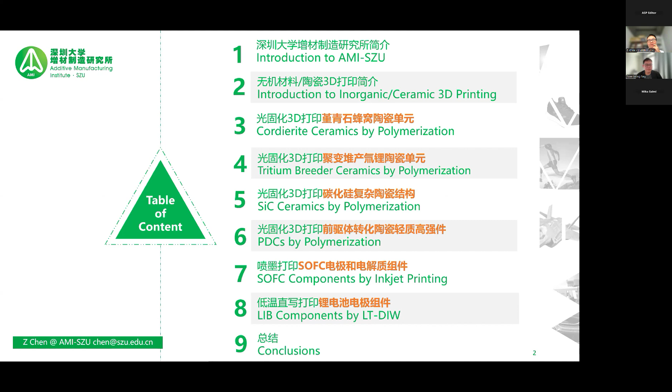A very brief introduction to the group: our institute has about 50 master students, including 7 PhD students, and 6 faculty members. In total, we have almost 70 people in the team for research, mainly focusing on 3D printing, including the material side, printing technologies, characterization of the printed parts, and the application side.

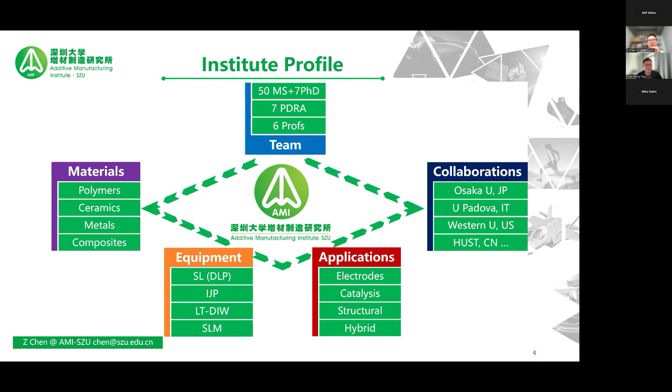These are the machines we have in our institute, for example the DLP 3D printing machines for ceramics and for resin, and also the DIW direct writing machine, SLM machine, and inkjet printing machine. If you are working on 3D printing of ceramics, you have to make your own slurry, paste, or suspensions, depending on the viscosity you need for the material. We prepare our suspensions or slurries using milling, control the particle size distribution, and sinter our final printed components using furnaces.

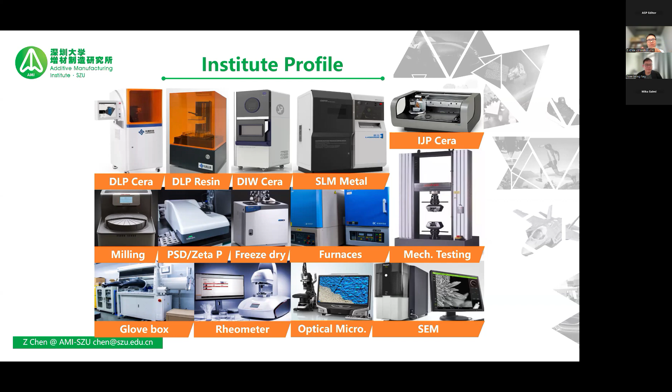And we also got some other characterization facilities, for example, the microscope and mechanical testing machine. So basically, for over like 80% of the work we can do in our institute.

An introduction to the 3D printing of inorganic material, basically for the ceramic part, as the forecast predicts that in 4 years time, we have like 7 times the increase regarding the high-end hardware, and also the technical parts, material side as well. So the ceramic or inorganic material additive manufacturing market is still expanding.

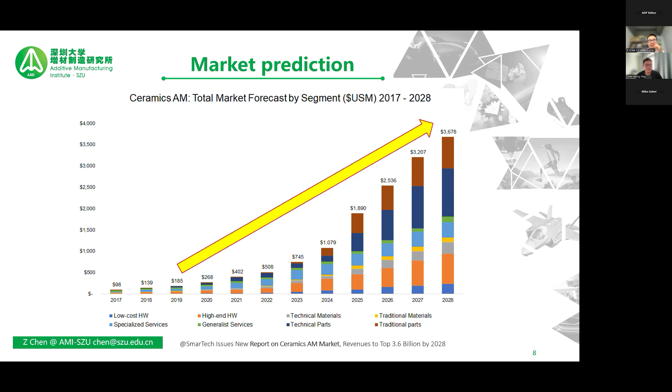For ceramic 3D printing or inorganic material 3D printing, it's not like resin or metallic components, because if you try with resin or polymer, metallic 3D printing is mostly like one step, although there are some heat treatment or other types of post-processing steps involved.

They are straightforward. So for inorganic or ceramic additive manufacturing, you have to prepare your own slurry, which contains lots of polymer content. We have to remove them afterwards, after the printing process. So the shaping is basically directly relevant to the 3D printing process. Then there's heating. If the material is aqueous based, then we have drying as well. So heating and drying are some sort of basic post-processing steps for 3D printing of ceramic or inorganic material.

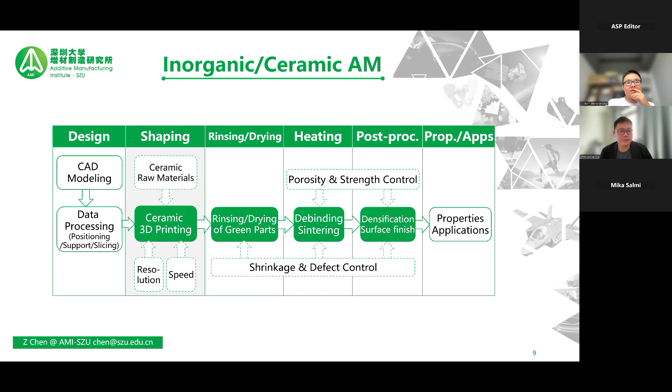So we were honored to have this publication in 2019, titled 3D Printing of Ceramics, a review, and it got nearly 2,000 citations till now.

We classified over 10 types of 3D printing technologies that can be used for printing ceramic, inorganic components. So basically, you can see from this table, in terms of popularity, stereolithography or DLP, digital light processing - these two processes are considered the most commonly used 3D printing process, or we say today, VAT photopolymerization (VPP). There's also binder jetting and selective laser sintering, which are of course very useful for 3D printing of ceramics, inorganic material. And the very low cost one is direct ink writing, because it's just like squeezing material from the nozzle, extrusion based principle.

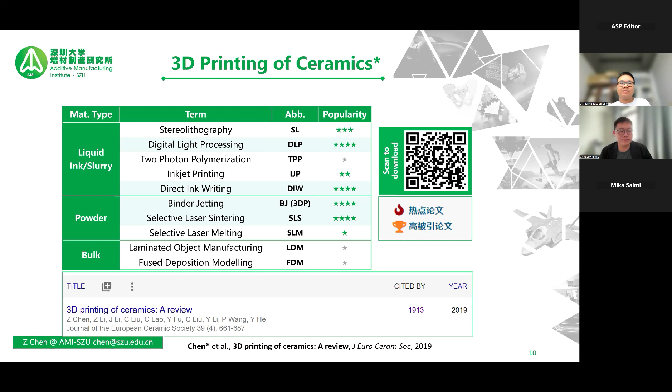And these are some of the examples which are quite popular in the industrial or academic field for research purposes. And some of the results I'm showing here are the 3D printed ceramic components. I was holding all these pieces of materials, components, because I want to show that these components are very delicate and also have fine features with high precision.

So these samples as well, the outer circles are mostly oxide materials, and the inner circles are some sort of polymer ceramics or inorganic material, which are more, in terms of functionality and structural durability, much higher quality. So they have different colors, which are very different from the oxide materials.

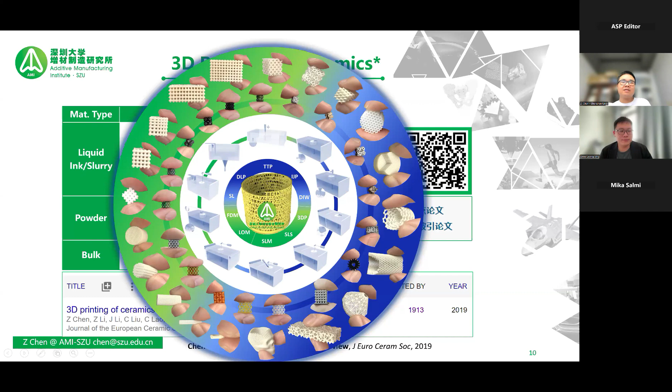And from now on, I'm going to show you some of the examples our group prepared for inorganic material 3D printing. So the first one is cordierite ceramics by photopolymerization 3D printing, and the basic background is the purification of air for vehicles, because nowadays in China you can see that we have lots of electric vehicles, but previously, like dated back to 5 years ago, the majority of cars were using gasoline. So in terms of pollution, in terms of purification, there's large demand.

So at that time, we started using cordierite ceramics for 3D printing, but people tried with different kinds of 3D printing technology. For example, SLS, DIW, they have low resolution. So at the time, we proposed using photopolymerization based 3D printing method for preparation of this kind of honeycomb structure for purification purposes.

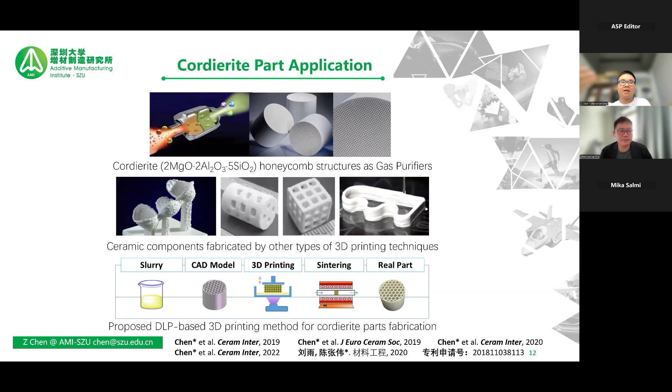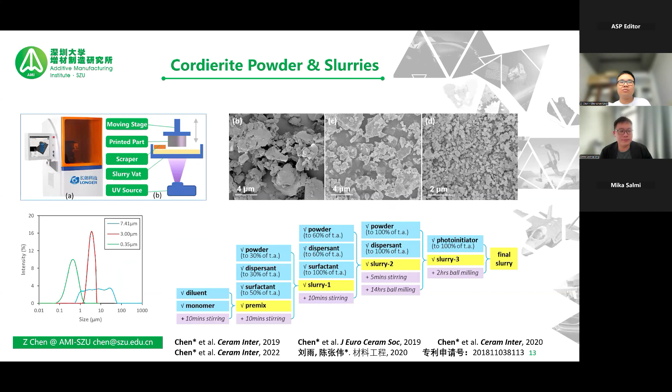And we started preparing our own slurry. The slurry is based on commercially available powder, different particle size powder, and then we tried adding lots of additives, organic additives, for example surfactants and dispersants. These kinds of additives can help improve the rheological properties of the slurries we use. And after preparing the slurries, we test the sedimentation ratio as well as the viscosity, because these two factors are very important for maintaining a stable slurry.

If the slurry is not stable, for example, if you print during the printing process, like 2 or 3 hours or even 10 hours pass, then the slurry sediments. So that can become a problem, because if they are not stable... So we tried different kinds of recipes and see which one is the most stable one.

And afterwards, we try with the most stable one, and see how we can print well with this kind of stable slurry. So we try with different units, for example, the holes, the single lines, the single layers, and lots of things we can do, and test the curing thickness as well as penetration depths and the critical exposure energy and so on.

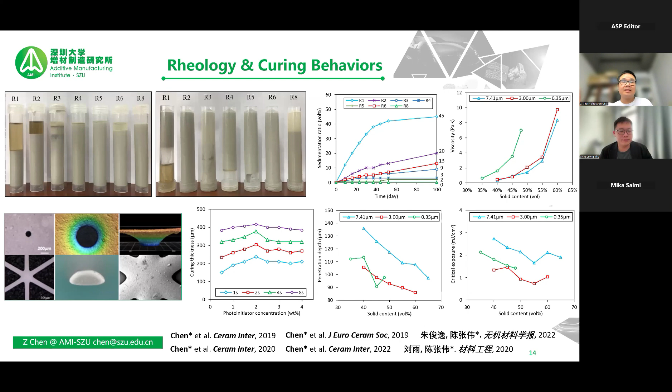There are lots of things we can do for characterizing printability. This is a special term in the 3D printing domain. Printability is a vital factor that controls the printing of the final 3D parts. Based on the design and topological improvement or optimization, we have been able to design different kinds of structures which are very different from conventional parts.

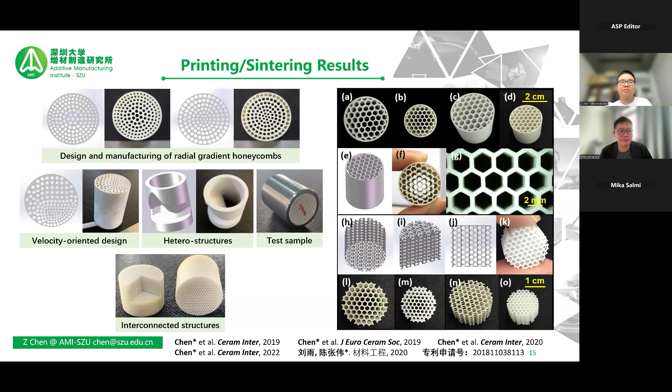Then after printing, we do the test. Some of the research is still ongoing. We are able to print many sorts of inhomogeneous structures which are not possible with conventional technology.

The second one is lithium orthosilicate, which is very interesting using 3D printing, vat photopolymerization 3D printing. The basic background is, nowadays we have many nuclear plants. Nuclear plants are based on fission, but there are some pollution issues, some leaking problems like in Japan. So fusion is another alternative method, nuclear fusion, which is the ultimate energy resource for humankind. It is regarded as a man-made sun.

In the sun, there is fusion. So nuclear fusion is happening, and currently it's still ongoing because it is not yet commercialized. What's happening inside? Currently fusion is made using the isotopes of hydrogen, tritium and deuterium. Deuterium is abundant in nature, like in sea water, but tritium does not exist in nature.

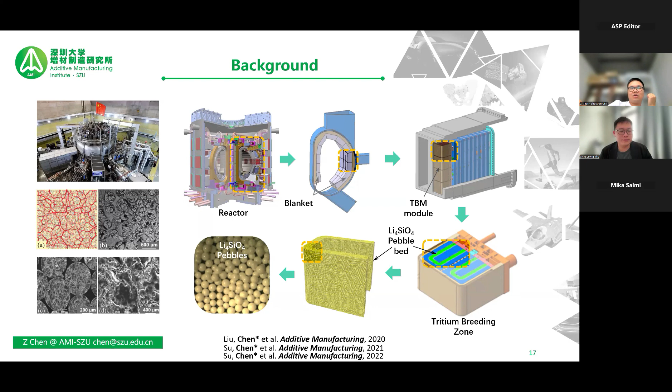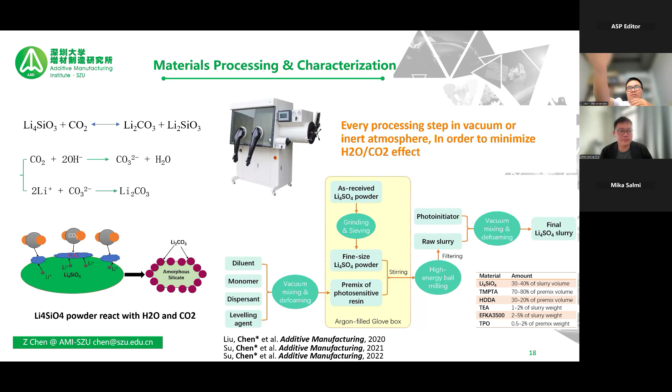We started preparing our own slurries for the first time, because lithium orthosilicate is a very reactive material. It can react with CO2 and H2O in air. So we had to put all these material processing procedures inside an inert atmosphere, like a glove box, and then we produce our own slurries, similar to the previous case.

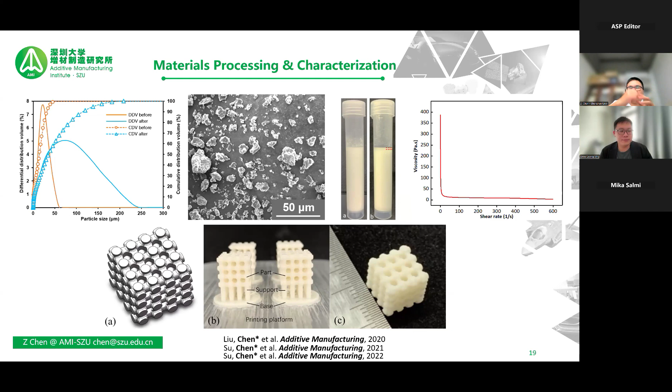Then we use photopolymerization 3D printing to print this kind of configuration, structures which are no longer the pebble bed structure. Instead we have a lattice structure here, and we tested the results, and they are much better than conventional pebble bed structures.

Second, we propose a generative shaping and material forming strategy, in Chinese 成形成性. This is because lithium orthosilicate itself is very expensive. We can say it's not commercially available, because we have to get this material, the powder, from our collaborator—there's no existence in the commercial market. So first it's expensive, and second, it's sensitive to air. These two issues are not easy to tackle.

So we tried a combination of A plus B, meaning two inorganic materials—this one and silicon dioxide. These two materials are no longer expensive; they are cost effective and low cost economically, and secondly, they are no longer sensitive to air. Because they are cheap and not sensitive to air, we can mix them together into a mixed slurry and then do the 3D printing.

So the 3D printing in this process is making the shape—there's a generation of the shape. Secondly, at high temperature, these two materials react together, like reaction sintering, generating the new target material, lithium orthosilicate. So: low cost, abundant resources, simple processing. This overcomes the two issues I previously reported.

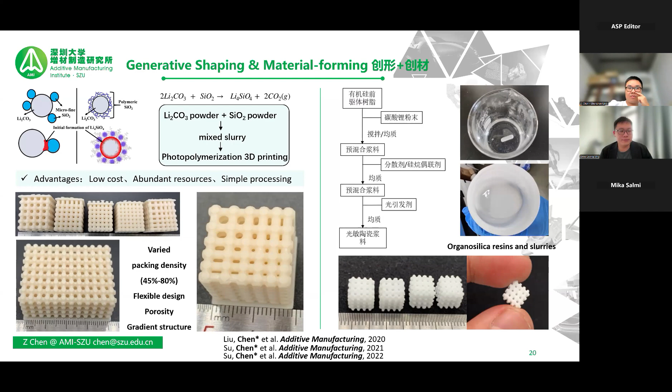And also during the whole process, you can see that we have some sort of improvement, because you know that 3D printing can generate a staircase effect. There's no way that we can eliminate it without some chemistry principle behind it. If you only try minimizing the layer thickness, the staircase effect always exists. But using this strategy, we can reduce the staircase effect, enhancing the surface quality.

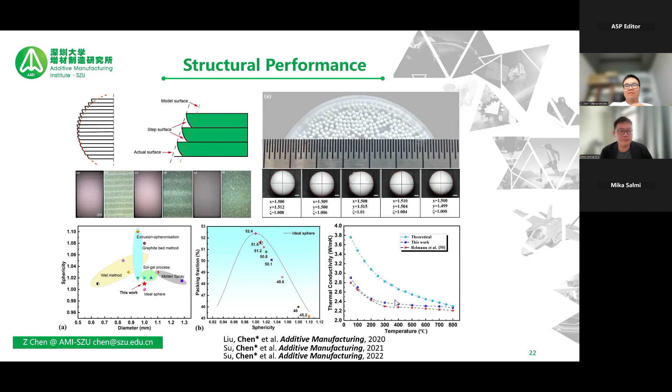For example, the staircase effect can be largely reduced, and surface roughness reduced by over 70% compared with the conventional method or previously reported 3D printing methods. And we are currently working on the reaction principle and seeing how it changes the surface roughness. Of course, there are some basic evident principles, like liquid phase coverage during the high temperature sintering. We are still working on that and seeing how it can improve the final results.

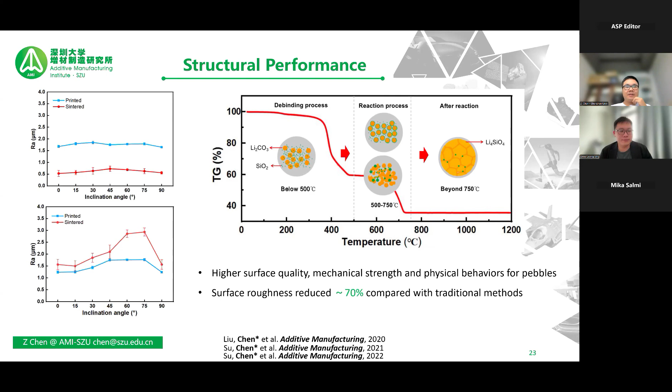And of course, we try with dual phase components like lithium orthosilicate as well as lithium titanate, these two components, and see what can happen, 1+1 is larger than 2 because of the multi-material. Then we can reach higher relative density as well as smaller grain size and better crush load. The crush load is very useful for the tritium breeding application. And this is the whole process.

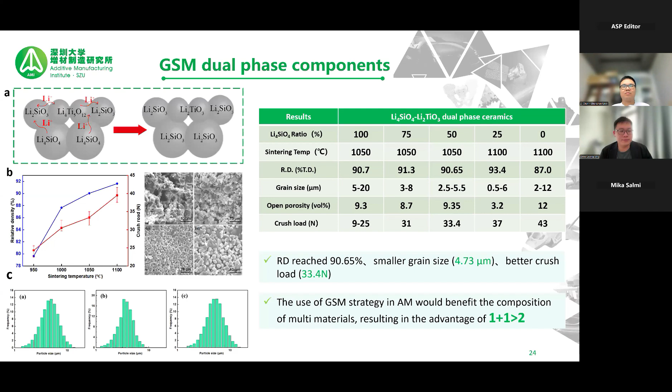And our student also drew this very nice picture showing that compared to conventional arbitrary bulk porous structures, the pebble bed may have some improved performance. If we try 3D printing for the lattice structure, the performance can be even better. And if we try the GSM, generative shaping and material forming strategy, the final result is much better. So we tried this material, and we are going to expand the applicability of this strategy and see how it can work for other combinations of materials rather than lithium-based materials.

Okay, so afterwards we had some international media coverage reporting this outcome, including English media as well. And the next one is silicon carbide ceramics by photopolymerization.

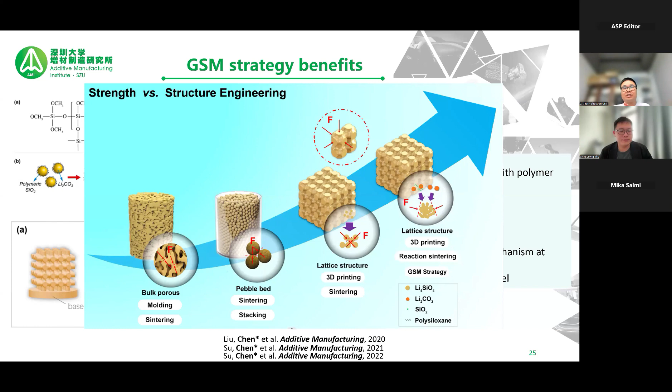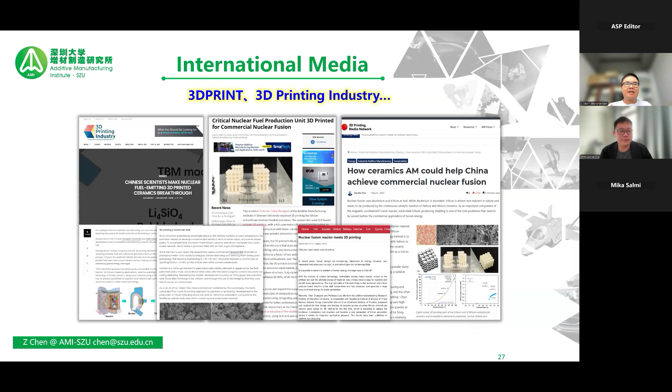For silicon carbide, if you want to use photopolymerization, it is much more difficult than oxide materials, because silicon carbide has a large light absorption coefficient compared to alumina and zirconia, like 10 times higher. So it's hard for it to be photopolymerizable. And what we propose is a kind of pre-oxidation. It means heating in air or even in an oxygen atmosphere, forming very tiny thin layers of silicon dioxide coating. So these shell coating structures can improve the printability.

You can see from the left hand side the single layer thickness can be improved like 3 times. So it's now like 107 micron, and the original one is 40 micron, so it's 3 times. And now we have like 120.

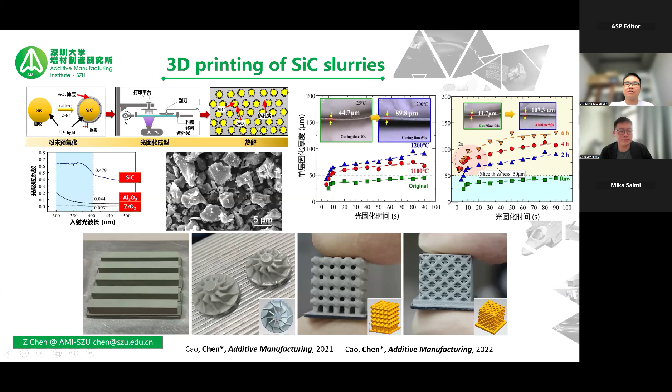So afterwards, based on this strategy, we can successfully produce 3D printed silicon carbide with highly complex structures. And you can see that we can apply the whole strategy very smoothly to different kinds of structures. After printing and sintering, we obtain very delicate, refined structures.

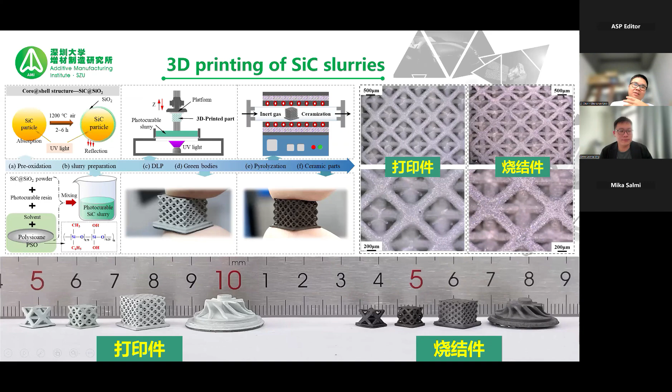It means that there's no slurries, no sedimentation, no viscosity issues; lots of things can be avoided. So using ordinary printers, like very cheap printers, you can just print the PDC, and there's no scraper needed for leveling the high-viscosity slurries like previously reported for all sorts of powder-based slurry. And

the resin, of course, is cheap, and one more thing is we can have a very fine control over the molecular level. Then we can dope lots of things like titanium, zirconium, ferrite. So all sorts of materials we can dump inside at this molecular level. The doping or the controllable recipe can be very advantageous, because of enhanced performance like mechanical properties, and also the electromagnetic performance can be enhanced by this kind of strategy.

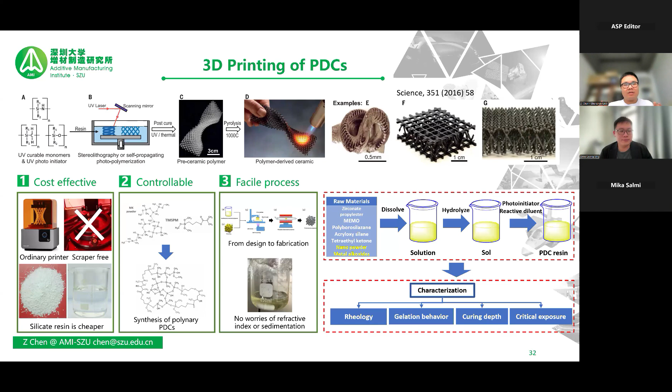And of course, resin. Okay, so the only additional step is using the high temperature pyrolysis. Well, it's the same as sintering, but the temperature is slightly lower. We call it pyrolysis because the whole process is more like a chemical reaction compared to the normal sintering stage. And we produce our own recipes. This is more chemistry, and we try to see the viscosity, the depth of penetration, and also curing behaviors, all sorts of things. And then we measure the sintering or the pyrolysis performance as well.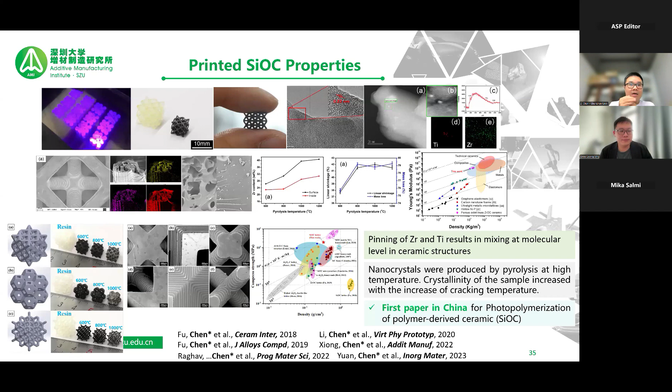Of course, using this method to produce 3D printed PDC is very, very difficult sometimes for larger size samples. So we investigated how we can improve the thickness and how we can reduce the cracking happening inside these structures. Because for this material, there's no powder involved, the weight loss is very, very high compared to the powder-based slurry, and almost 80% of the weight can be removed from the structure. So there's a large shrinkage, as well as resulting cracking and deformation.

And we try with lower melting temperature polymers, which can be used inside this material to create microchannels, which facilitate the removal of the high melting temperature polymers or organic additives, and this makes the channel smooth for the removal. And as a result, the cracking can be eliminated. Then we try different thicknesses for the monolithic material as well, and these have a larger size as well as good mechanical properties.

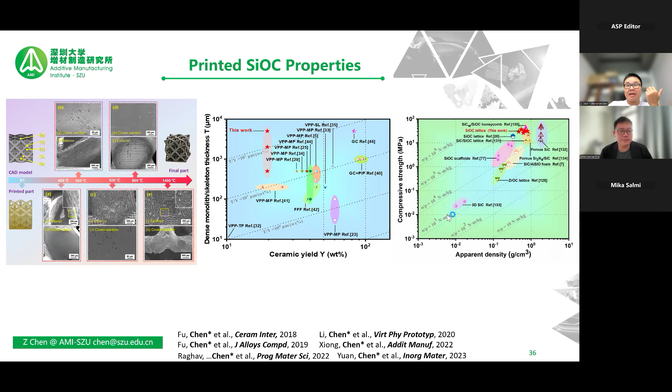And a very minor summary of what I have been talking about previously. Starting from the inorganic material like ceramic powder, which is the target powder from the beginning to the end, it's just generative shaping by 3D printing. It means that the 3D printing is only to create a shape. There's no possibility of generating new material. At least the majority of material stays the same.

Then we propose using A plus B methods, or the generative shaping and material forming method, like a combination of inorganic material with inorganic material, and inorganic material with organic material. And finally, the precursor method using PDC. It's all organic material. So this is the generative shaping and material forming.

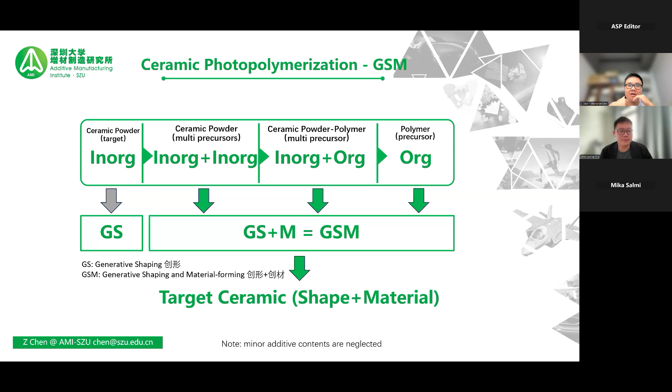And we also produce our high-speed VPP 3D printing. You can see that it's like a CLIP, with the underlying mechanism being the photoinhibition strategy. We want to use this method to produce, firstly, the commercially available resin, and secondly, the PDC precursors. And then we try with the slurries, because the slurry is very difficult with high viscosity, and the viscosity increases from the resin to PDC precursors and then the slurry. So with the increase of viscosity, the difficulty is also augmented for this kind of technology. Well, there are some benefits, of course.

First one is the elimination of staircase effect using this strategy, and secondly, of course, the improvement of isotropic behavior, which is very useful nowadays. For 3D printing, the XY direction is different from the Z direction if we try to do the mechanical testing.

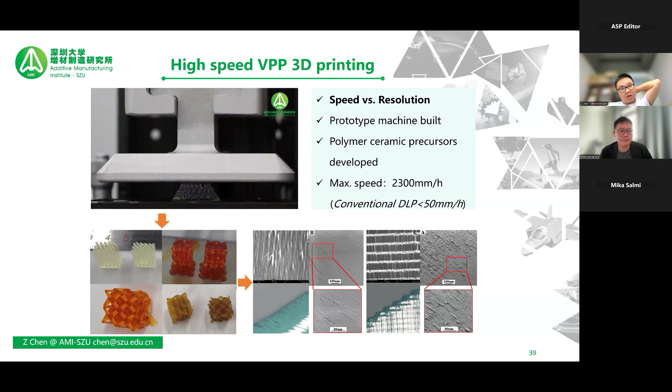Then, apart from VPP photopolymerization, we also work on the solid oxide fuel cell using inkjet printing. Because time is limited, I only briefly introduce that 3D printing can produce inorganic materials within the SOFC components, like electrode and electrolyte, because some of them are dense and some of them are porous. We prepare our own inks with low viscosity and high solid content, and we were able to produce the porous structure and a very thin electrolyte structure as well, only 4 micron with 20 passes, 20 layers, and then we try

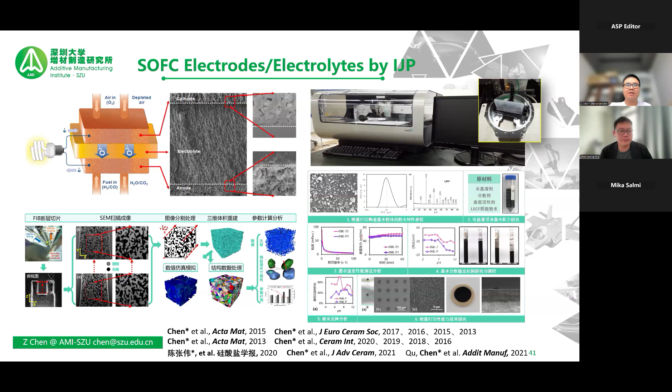a full battery as well to see how it can improve the electrochemistry behavior. Okay, so I'm not going too much on these conclusions.

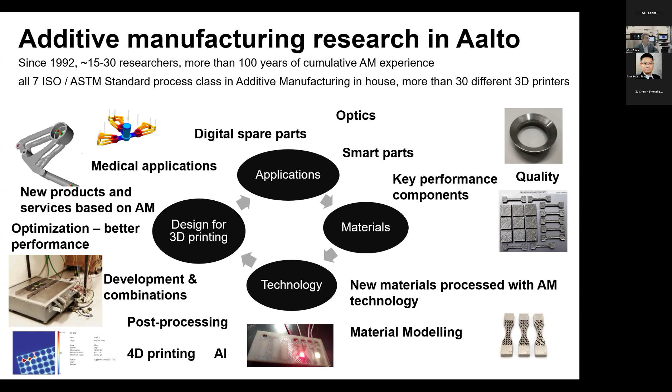Material modeling, especially for metals, is also in our interest. And for the AM technology itself, we develop our own technology and combine it—4D printing and AI, especially process monitoring related things, are very important. For printing, you always need 3D models, and this is where you can optimize the design for better performance. So this is what we do at Aalto.

Now to 4D printing. Basically, what 4D printing is: you 3D print the object, then expose it to a stimulus, which can be temperature, light, or something else, and then over some time it will change its form. That is how it's defined, and the fourth dimension here is time.

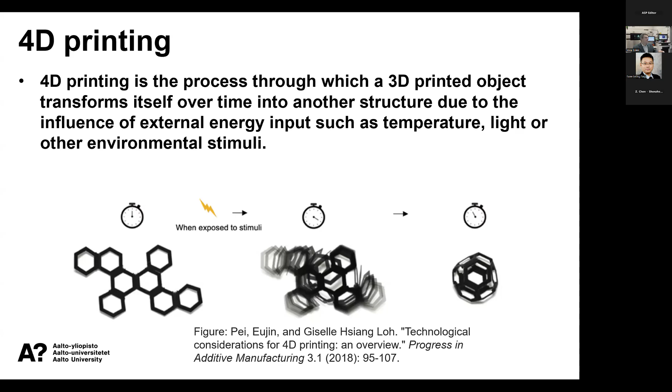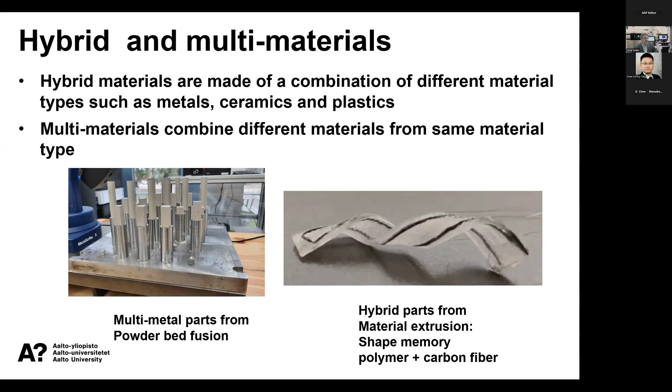If you try to define what a hybrid material is, in this presentation I will use it to mean when we are combining different material types. So we have metals that we combine, for example, with plastics, or metals combined with ceramics, and so on. That is a hybrid material—not combining two different steels together. There's also multi-material with powder bed fusion, or hybrid material parts where there's a shape memory polymer with carbon fiber inside.

Now, more to the research we have done. The first one is self-sensing hybrid parts.

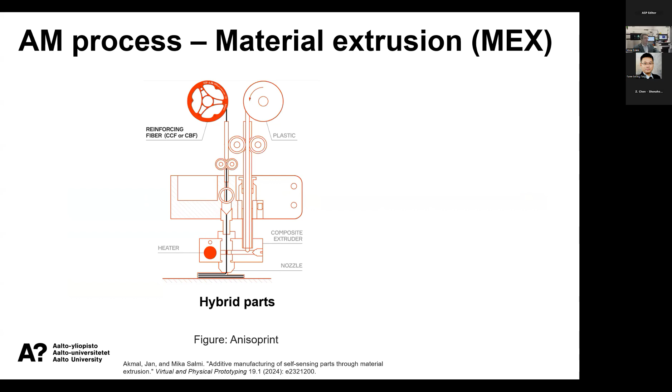So we are using an Anisoprint. This is a material extrusion type of printer, but what's unique here is that it can feed fibers through the nozzle, and we can position fibers inside of the prints. And of course, we have tuned the device so we can also put metal wires inside of a plastic part.

So what was the first thing we tried with this? Trying to make this kind of self-sensing part. Basically, if you know how a strain gauge works, you have a strain, and then you have this kind of gauge, and you're measuring the resistance. If you are bending, pulling or even pushing it, you should have a different resistance because the material or the diameter of the wires will slightly change.

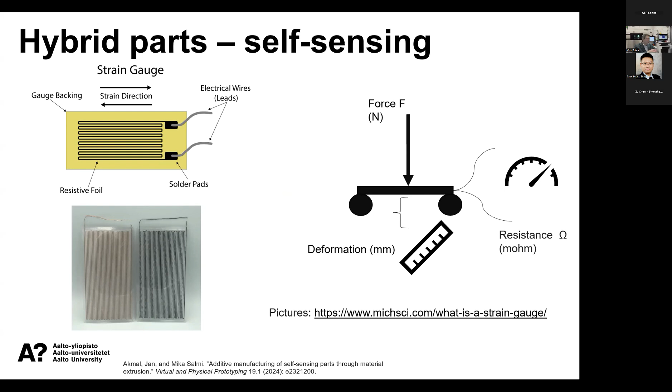So what we did was make two different kinds of test plates from different materials, and then we tried to bend them and see how the resistance would change. Different kinds of specimens. Specimen A has only one wire. We have a flat plate with a width of 35 and a length of 70 millimeters, and only one carbon fiber or one copper wire there.

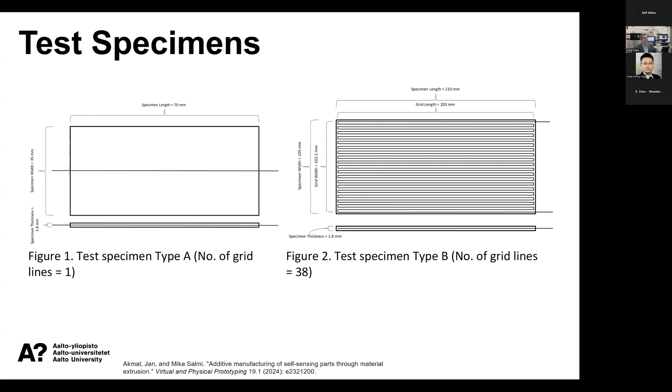And then we try to use the whole width of the specimen, going back and forth, basically one wire going back and forth as much as possible, so 38 times going back and forth, to make the phenomenon bigger, so the resistance change would be bigger because there are more lines there. So this is how we test it.

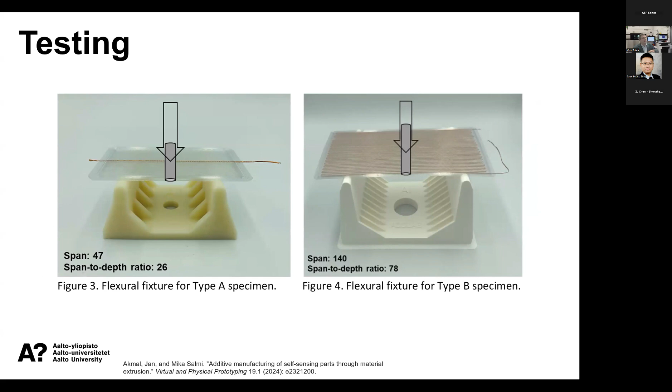We make a jig where we push it, and we measure how much we are pushing, and we measure the resistance change, and this is the results. Actually, you can quite well predict how much it's been bent if you have enough fibers there. So if we first look at this picture from the bottom left.

This is specimen A with the carbon fiber, only one wire of carbon fiber, and here you can actually see that it's hard to say anything because there is so much noise. So with only one wire, you cannot predict too much. But then if you have only one copper wire, this follows quite nicely how much you have deflected and what the resistance change is there.

And then of course, if you want it better, adding more actually doesn't help, because there are these corners, and you don't even get too much better values, slightly better, but not too much. And then with the carbon fiber, where you add the carbon fibers, you can get it better because this noise will get lower.

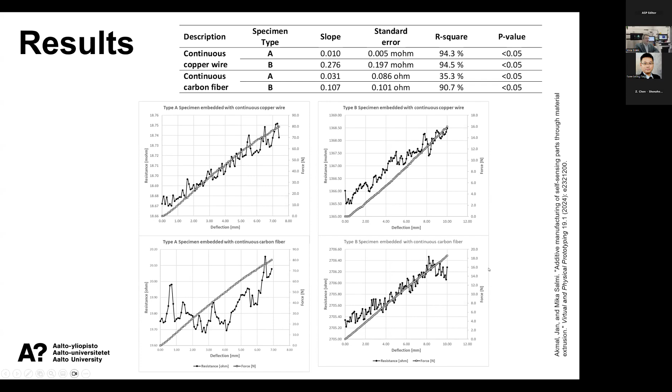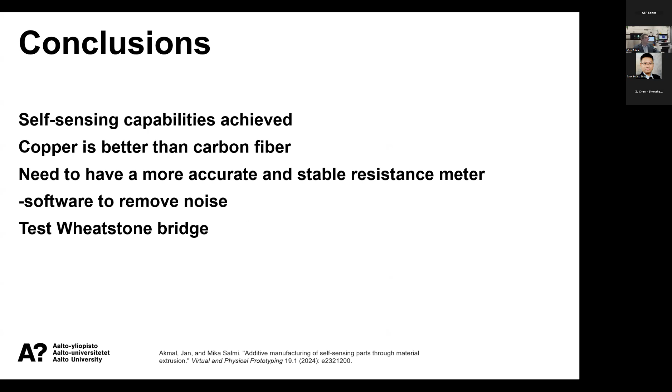So basically about this, this copper is better than carbon fiber, and what would maybe be the next steps would be to have a more accurate and stable resistance meter, or maybe some software to remove the noise, and maybe building a Wheatstone bridge so that could turn this resistance to voltage and have better accuracy for the measurements. But the basic concept works.

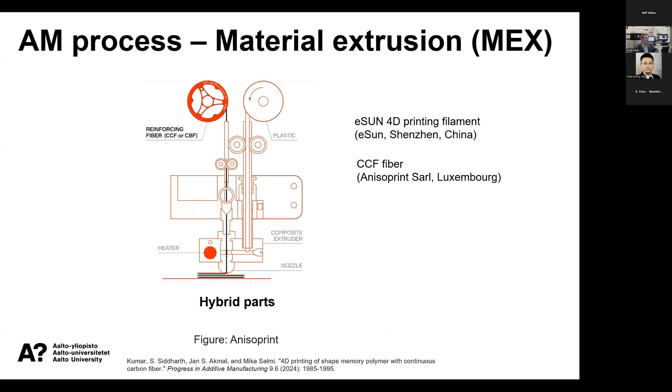Okay, the next one, this is hybrid parts with shape memory polymer and carbon fiber. So again, the same printer, but now we have a 4D printing filament there, actually from Shenzhen, China, and then we have a carbon fiber from the Anisoprint.

And what we are looking at here, we are trying to see if the outer geometry of the specimens would be the same, but how the different kinds of layouts for the carbon fibers would work. So we have a horizontal layout, we have a vertical layout, and then we have a cross layout.

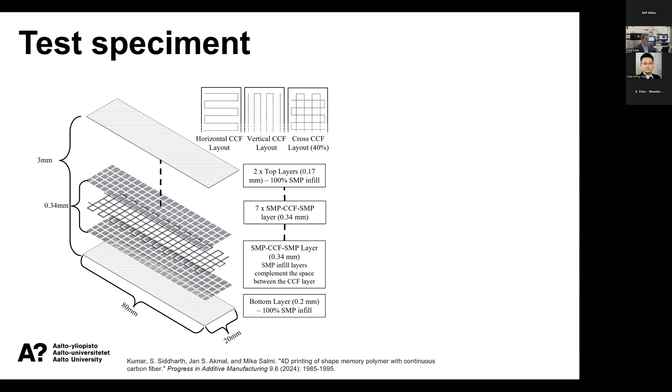And how the samples are made: first we make a bottom layer, which is pure shape memory polymer. Then we have layers with carbon fibers and shape memory polymer, and then we have the top layers which are again pure shape memory polymer, and between the fiber layers there is also shape memory polymer. So then we can get the nice matrix parts.

So the process: we test the specimens, then we are heating them up at 80 degrees Celsius for 10 seconds, and then we are doing this kind of mechanical deforming, because we want to change the shape.

So when it's in the soft state at 80 degrees, we will change the shape and let it then cool down. So then it will have that shape, but we bend it slightly, not too much so that something will really start breaking there, because then we don't know actually what we are measuring.

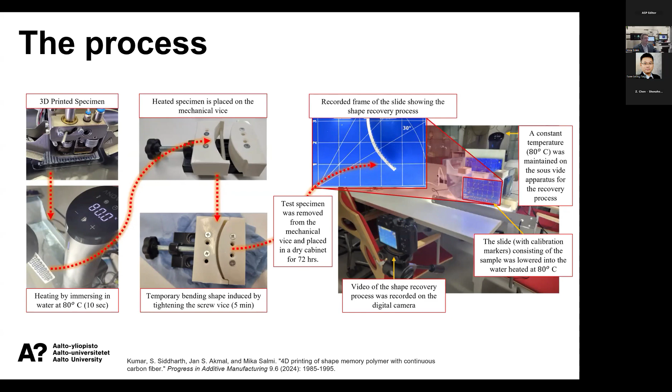And then we dried those samples, and then we put those in hot water and recorded the shape recovery process, using a digital camera and camera monitoring with some software to really get detailed answers on how these different fibers would influence it.

So here are the specimens. We have a control specimen with no carbon fiber, vertical carbon fiber specimens, horizontal, cross with layout 40, cross with layout 50, and cross with layout 30. So different kinds of infills, and of course we could use other kinds of fill patterns too, but this was the first try to see.

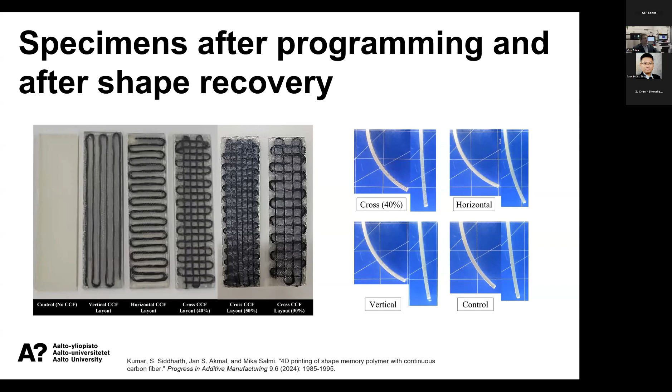And actually there is quite a big difference between these. So actually those fibers will work like a spring. You can have a better recovery rate with this, and you can have a better fixity with this. And here are some results.

So if you look here, the yellow line is the control. Actually, we can influence how fast and how much it will recover.

So for example, shape recovery with that geometry is about 80% with the control. And if you put the vertical, or have the cross, we can get somewhere in the 90%, which is much better. But of course, if you want it worse, we can put the horizontal.

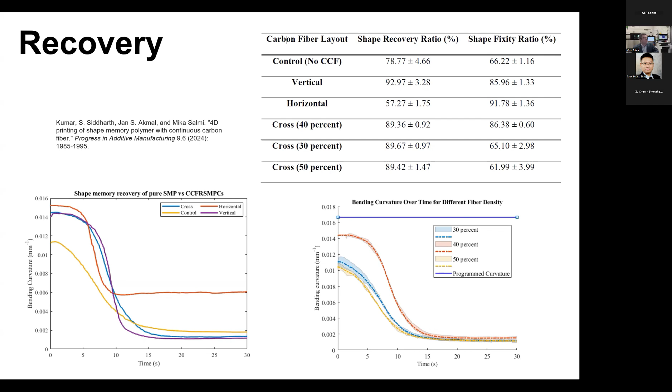So with the fibers, here's an example. We have horizontal versus vertical. The horizontal is faster, but the recovery rate is not so good.

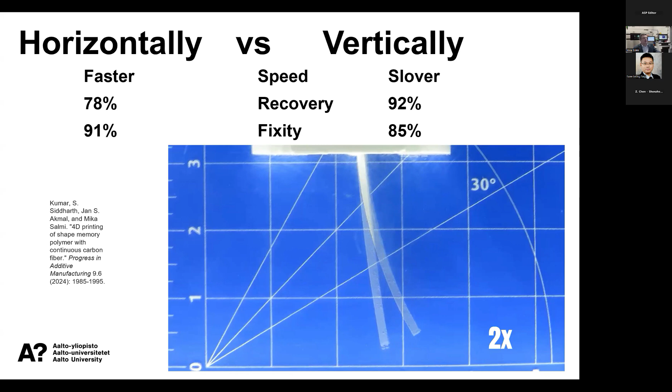So actually influencing the properties, what makes this interesting is that we can put different layouts in different places. So we can really try to tune the material for how it behaves. Some conclusions: to improve the shape memory capability and have a higher shape recovery ratio or higher shape fixity ratio, this fiber layout and density has a big influence.

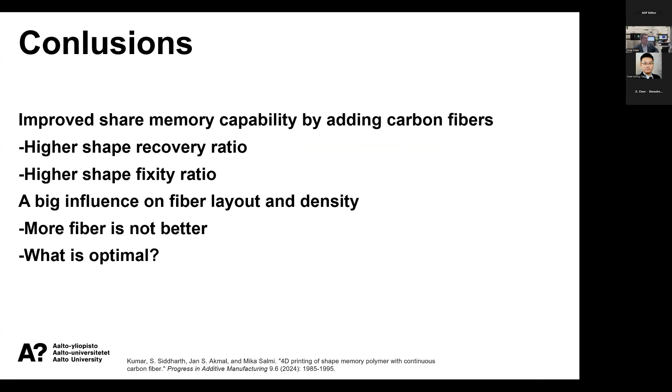And to be honest, more fiber is not actually better. So what is optimal is still under work and to find out. Okay, then we could go to the next one.

So this is again a desktop printing setup. We have material extrusion, but now we take another process after it. So we are using atomic layer deposition to have some kind of electrical conductivity. What we are aiming for here is making an electric circuit for an ultraviolet light sensor. This is a space application related thing.

And we have a standard Ultimaker S5 Pro printer, and we are combining ABS and polypropylene. So actually the first thing here was to find suitable materials that we can join together, not necessarily having huge mechanical properties, but having the ability that we can print them together.

And the other one should be where this ALD process sticks very well, and the other one where the ALD process doesn't stick at all. So we tested plenty of different materials to try to see which could work in this ALD process, and then we figured out that ABS works very well in the ALD process, and coatings don't attach there. So it's a very good material pair for this kind of selective coating.

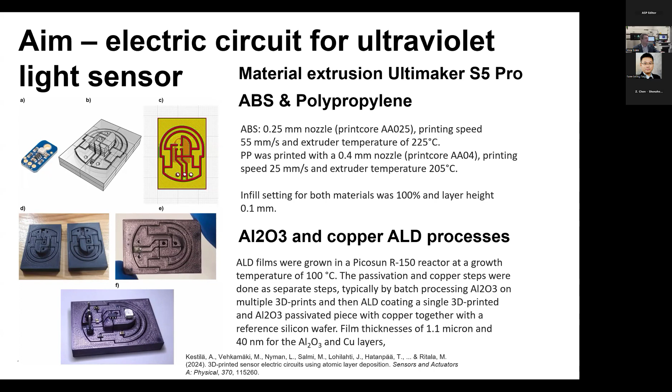And then we actually tested this. So we had the normal one. We joined the components in the circuit, and then we put it to the test.

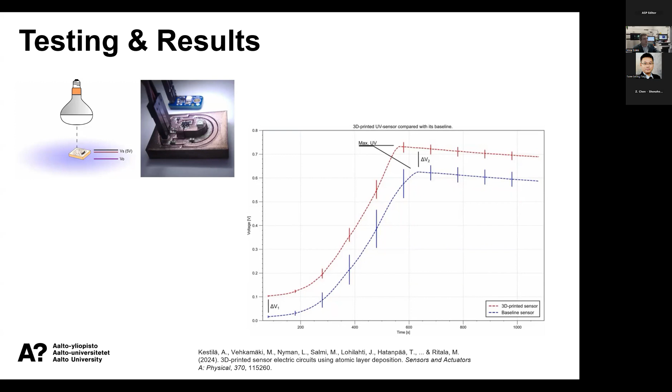And actually, if you look at the baseline sensor and then this 3D printed sensor, it actually quite nicely follows the curve. Of course, there is some voltage difference, but it seems quite constant here - there is no huge difference there. So that's actually quite good.

So we were able to 3D print this sensor board for this ultraviolet light sensor, and then this was selectively conducted. So we were able to do it, meaning a much more automatic process. If we could print the parts and then put them in the ALD reactor, we can get the circuits ready. There was some additional resistance in the 3D printed sensor, but that wasn't very significant.

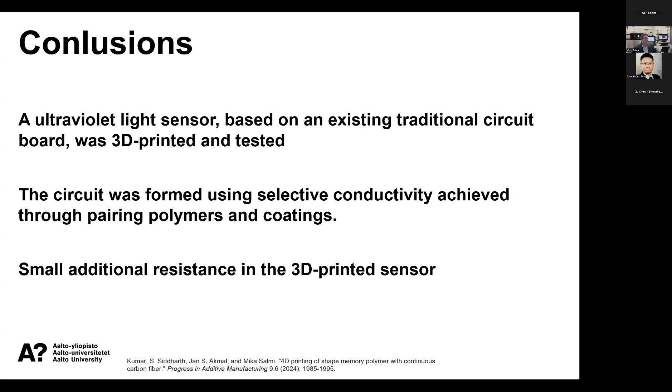Then we could go with continuous carbon fiber reinforced bronze matrix composites. For this we are again using a material extrusion printer, and we are using carbon fibers there. But now our filament is containing this kind of bronze, so it's containing metal particles, a lot of metal particles, and we can sinter them in our oven and get metal parts out from basically desktop printing with material extrusion. But unique here is that we want to really put carbon fibers there, and we know that the carbon fibers will survive in those temperatures that we use for sintering.

Of course, a lot of those properties are made during the sintering phase. So for sintering here, we go 2 degrees per minute from room temperature up to 300, then use something slightly slower when things start happening - only 1 degree per minute up to 450, where the binder from the filament will start burning away, holding it for 1 hour, then go slightly faster to the 900 degree target sintering temperature, hold there 5 hours, and then cool down.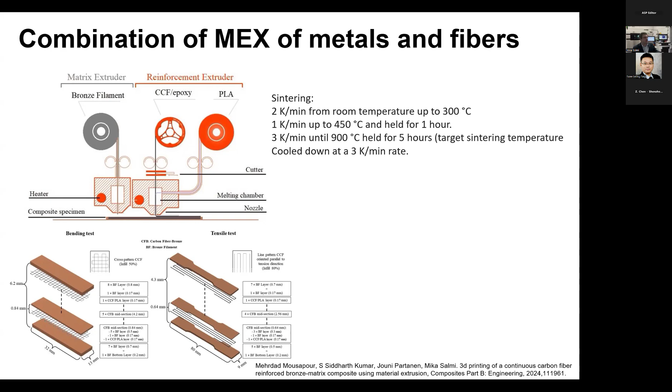And again, we cannot put the fibers on top of each other layer. We need to make non-fiber layers because they are slightly thicker than the normal layer. So we need to put layers with the fibers, otherwise the printer doesn't work.

Here is some testing and results. We made the 3-point bending test, making parts without the fibers and with the fibers, and compared what we can have there, which affects different kinds of properties, and what we can improve.

Again, this is like a first test to see what we can do. But this allows us to try to define the parts or put the fibers in a way that the parts would have better properties where needed. So that's the idea.

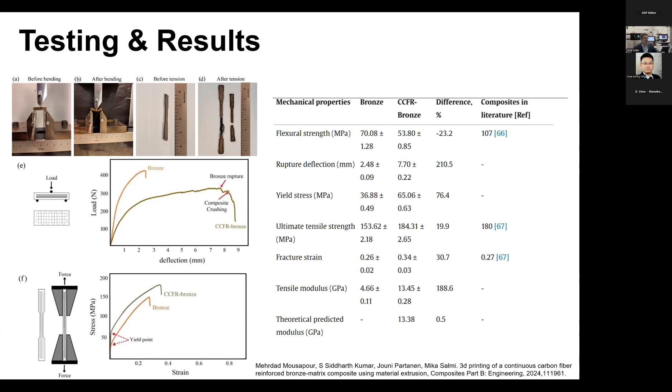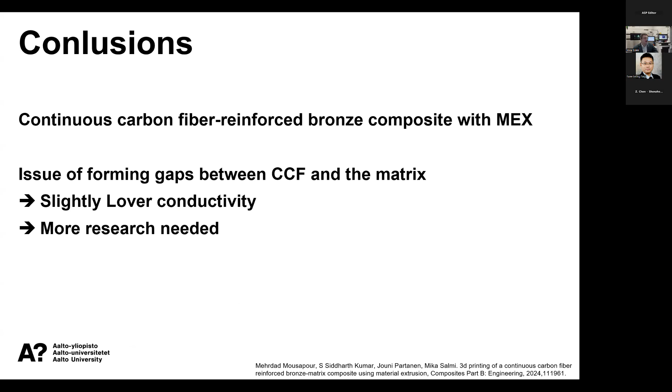So some sort of conclusions: for this continuous carbon fiber bronze composite with material extrusion, there are some issues of forming gaps between the CCF and the matrix, and I think that will slightly lower the conductivity at this point. There is actually a lot more research needed around this to see how and what we can really achieve with this.

And some overall conclusions - there's something coming, a sort of sneak peek video. So all of those concepts work, but still need a lot more concrete applications or tuning, trying to determine the application. We will try to print the processes slightly here, looking at parameters, how the geometry should be compensated, different materials. Sintering is a very big thing if it's there - I think it's the same in ceramics. And then some combination of these, still pending, and something more complex is under work.

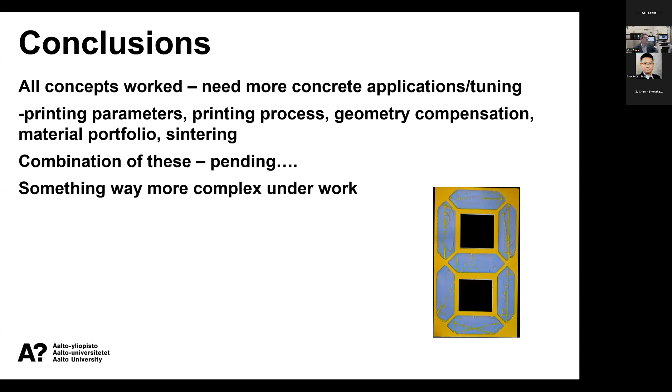So thank you, that was the short presentation. Questions, comments?